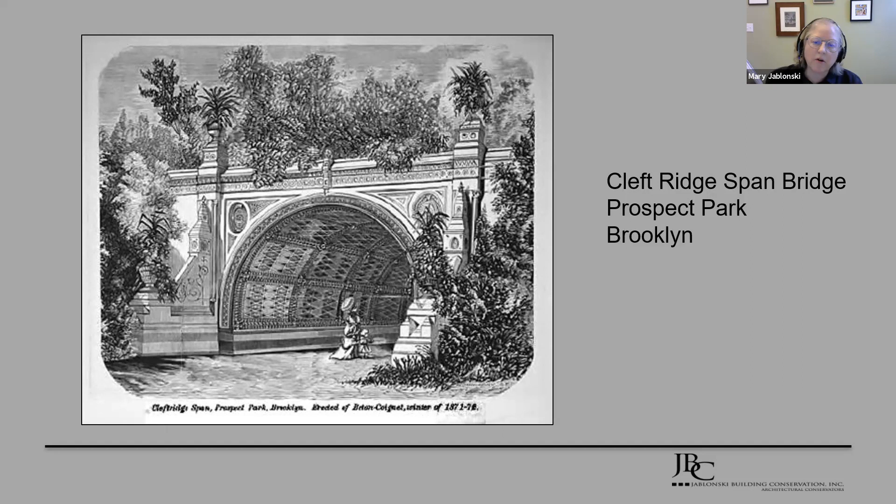And of course, the principal advantage was they could easily produce a lot of the decorative elements quite quickly. And it was much faster and less expensive than carving these units. And here again is a relatively recent picture of this bridge. And you notice that it seems to be in quite decent condition.

Now, as Brooklyn was developing industrially, the Gowanus area became central to the development of Brooklyn. In the 1840s, the Gowanus Creek was a tidal estuary flowing into the Gowanus Bay in New York Harbor. The construction of the canal began in 1849 and was accomplished by deepening and widening the Gowanus Creek and putting in bulkheads along the waterfront. The canal was fully built out by 1869.

It became the center of the industrial growth in Brooklyn, and by 1880, actually, there were 31 firms operating in different industries, such as lumber, coal, hay, grain, and of course, building materials. A decade later, these industries expanded to also include utilities such as gas and electric. But the industrial development also spurred residential housing surrounding the canal basin for canal workers. And the Coignet Building Company became part of this growth.

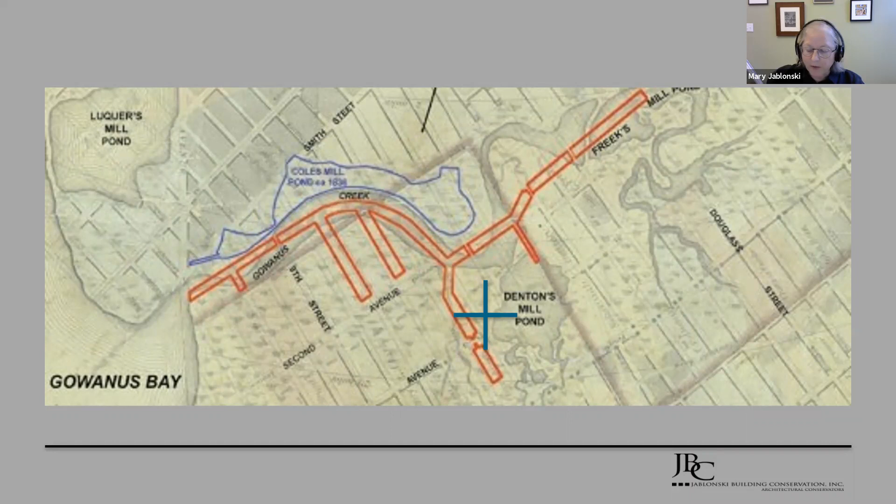As its materials became more popular, there was a need to expand their factory beyond the Carroll Gardens site. They decided to move to the new Gowanus Canal, to the large manufacturing space on 3rd Avenue. It would allow them to easily bring their cast stone into the heart of developing Brooklyn.

As the new factory went up in Gowanus in 1872, the company changed its name actually to the New York and Long Island Stone Company. By this time, it was reputed to be able to manufacture the fronts of 10 houses a day, in addition to all the other decorative elements they made. And their stock list included columns, blocks, keystones, window tracery, and of course, urns.

In addition to their factory, they required a building for offices and showroom. Built in approximately 1872, although the date might be 1874, this building was reputedly designed by William Field and Sons, and the building became part of the 5-acre factory complex that ran along the Gowanus Canal.

Of course, the company constructed their offices with the Béton Coignet cast stone. After all, it was serving as a model of the work that could be done by the company. Customers could see the possibilities of this cast stone actually used. The blocks that made up this building were tinted and treated to resemble stone. Now they could resemble either the grayish-white granite, brownstone, but here they actually used it as looking like limestone.

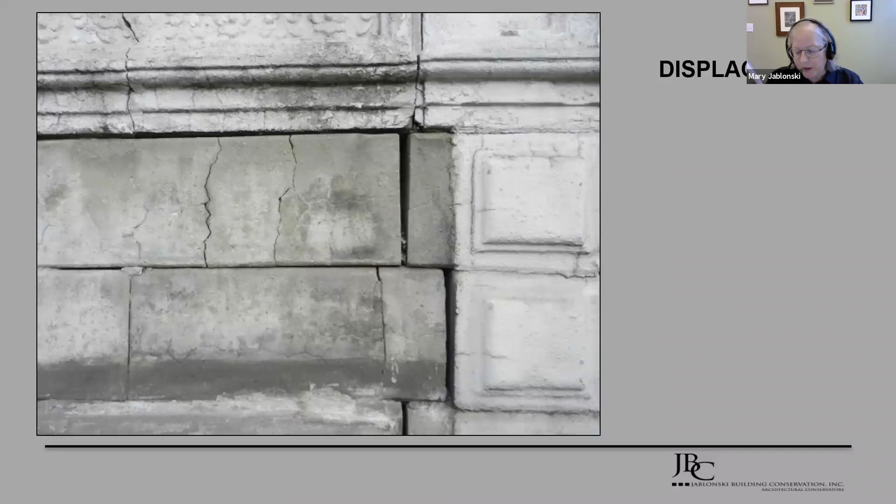Our conditions assessment started as demolition was going on around us. The displacement of some of these extremely large cast stone units, and hopefully you can see here some of these units are really quite displaced, was very disconcerting. The blocks were large and there was nowhere to run if anything went wrong. The realization of the amount of work required was a bit overwhelming, as this displacement was fairly typical for conditions on the building.

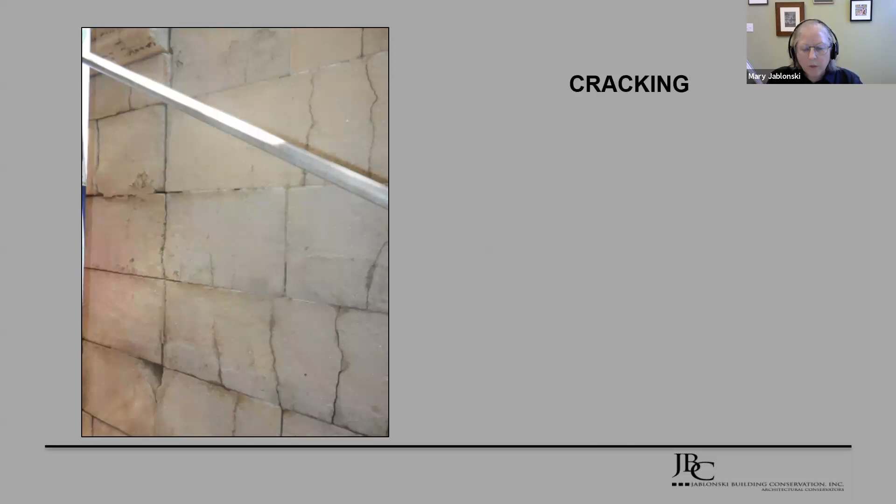It was soon apparent that the cast stone was a veneer, but we didn't know how it was attached to the backup wall. And the demolition occurring at the top of the building as we were surveying didn't add to our comfort. We found a few masonry anchors, but most of them were rusted or in poor condition. We found significant cracks, including hairline cracks everywhere. There was a lot of weathering due to wind, rain, snow, pollution, acid rain, and even salt water. Don't forget, New York City's not far from the ocean.

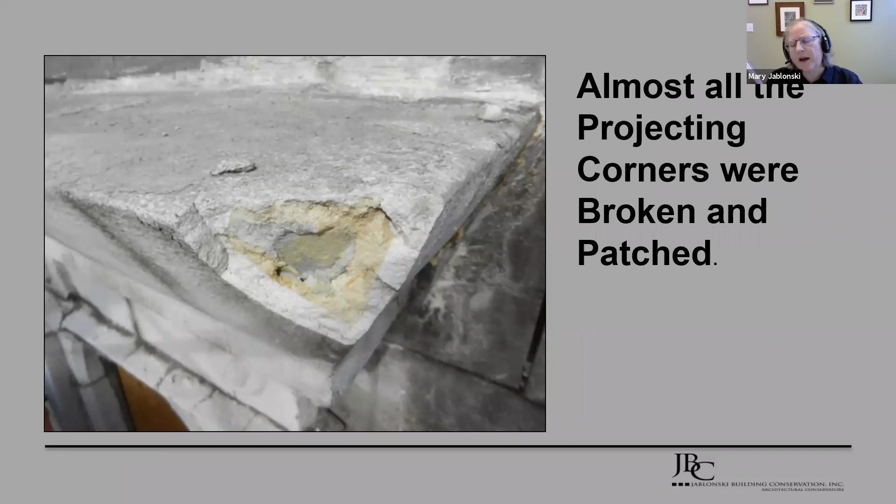There was erosion of cement paste, exposure of aggregate particles, and a loss of crisp edges. There was still brick face on two facades. You can see some of it from the older one. And actually there was this interesting phenomenon that we also found here, and that was almost all the projecting, in fact, all the projecting corners were broken or patched. And possibly this was because they were exposed on four sides, but it appears to have actually been a weakness in the casting of these units.

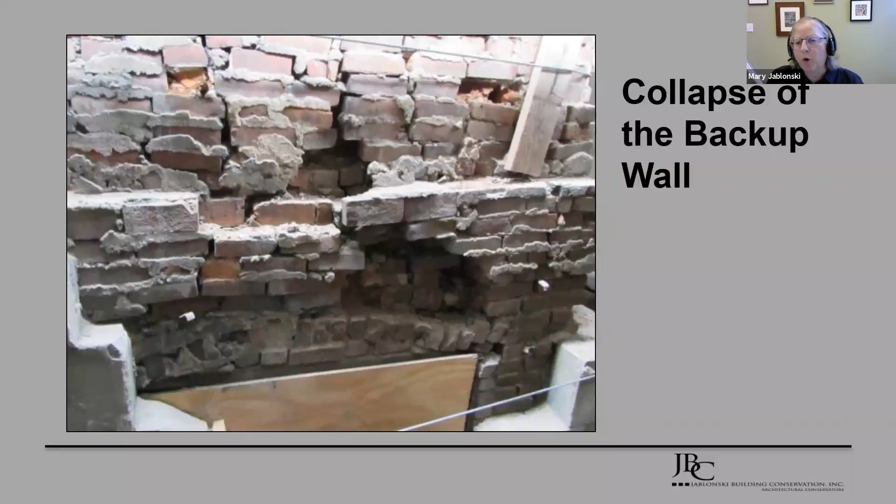There was also a lot of cementitious white paint on any of the cast stone units that had been left exposed. And just to top it off, there was bituminous coating on the back of the building. Most of the window openings were collapsing. The keystone had actually fallen out of one of the openings, which was being shored up. Just to make it even more exciting, the backup wall was collapsing in two locations.

Another important piece of information that we needed for this project was what was the Coignet beton made from? Several people had informed the Landmarks Preservation Commission that the cast stone was natural cement. And that was a reasonable assumption. David Saylor, who was the first to make Portland cement in this country, or at least make a usable one, started fabricating his Portland cement in 1875. And the Coignet Building is 1874.

And in the US, the first large scale cement was Rosendale cement, a natural cement, which was discovered in the 19th century near Rosendale, New York. Now, Rosendale was extremely popular at this period. It was used in the Statue of Liberty, the Capitol building, the Brooklyn Bridge, the Erie Canal, and also lined a lot of water pipes. But while the United States was not producing Portland cement until 1875, it was importing it. The first recorded shipment of Portland cement in the United States was in 1868.

And now, there was a bit of research that John Walsh from Highbridge Materials Consulting turned up on Gillmore's writing on the topic. In 1871, Gillmore had published a practical treatise on Coignet beton and other artificial stones. And a couple of his comments are quite interesting. For beton agglomeré, he says, this name is given to a beton of very superior quality, or more properly speaking, an artificial stone of great strength and hardness, which has resulted from the experiments and researches extending through many years of Monsieur François Coignet of Paris.

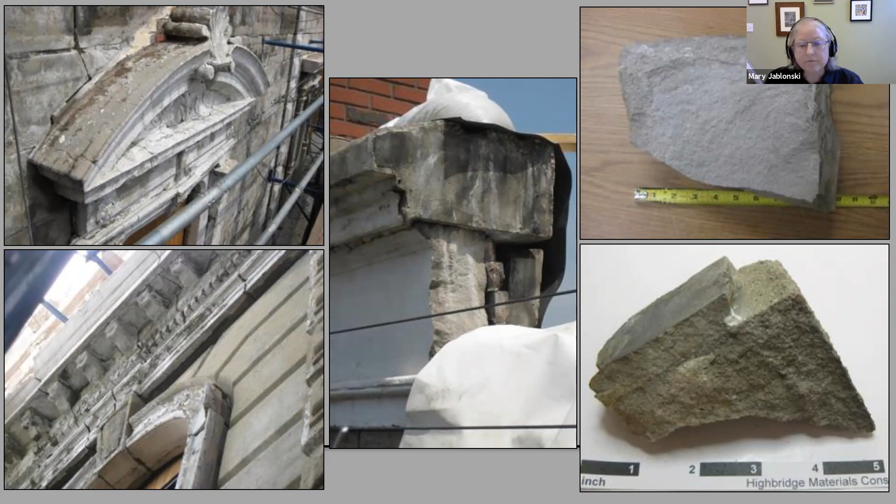So we needed to take samples that we could analyze, and we were told that we were to take an absolute minimal amount of samples that we had to. So we were limited. We selected locations. We took samples, as you can see on the right. The petrographic and chemical analysis of the cast stone was performed by Highbridge Materials Consulting. John Walsh was ecstatic to be actually looking at this stone.

And I can't emphasize enough the importance of using petrographic analysis as part of any thorough investigation to an on-site condition survey of deteriorated concrete structures. Too often, conclusions concerning the nature or cause of deteriorated concrete, as well as the repair of the same, are based on visual observations only.

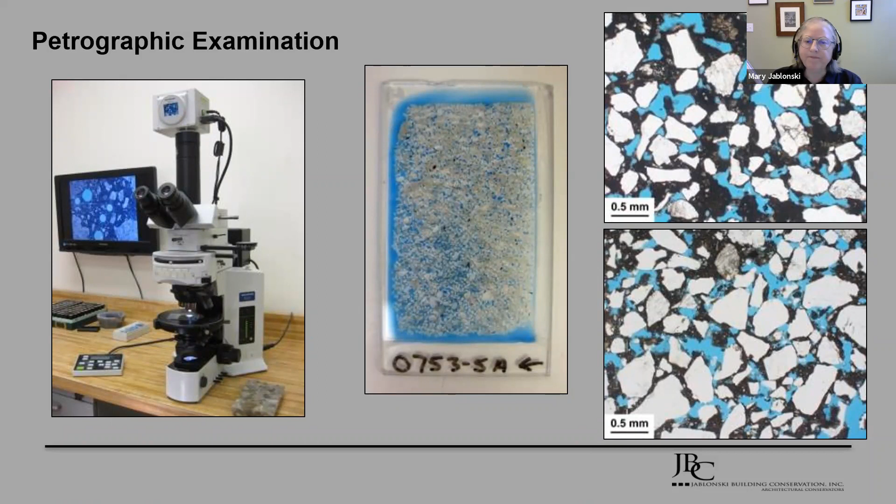But petrographic analysis can be used to identify chemical and physical elements of the concrete, including the nature of deterioration, the identification of aggregate strength, mixture proportion estimates such as water and cement ratio, aggregate size and distribution. And we actually found some really fascinating findings from this.

This was the aggregate. Now, a number of you probably are quite conversant with aggregate in Portland cement or in cast stone. This is extremely fine aggregate, not what you would ever think would be found with concrete. Another incredible finding was that this was pre-rotary kiln Portland cement. It was European, probably French or German, not natural cement.

And in the early days of Portland cement production, kilns were vertical and stationary, as you can see on the left. It was only in 1885 that an English engineer developed a more efficient kiln that was horizontal, slightly tilted, and could rotate, which you see on the right. The rotary kiln provided better temperature control and did a better job at mixing materials. By 1890, rotary kilns dominated the market.

And just as an aside, in 1909, Thomas Edison received a patent for the first long kiln, which he installed at the Edison Portland Cement Works in New Village, New Jersey. And it was 150 feet long, which is about 70 feet longer than any of the other kilns used in the period. But back to my Coignet Beton.

The other findings were that it was dry tamp, or a very dry cement that was rammed. The beton was actually itself in excellent condition. There were no major durability issues. The problems that we had seen with the cracks were consistent basically with structural rather than material issues.

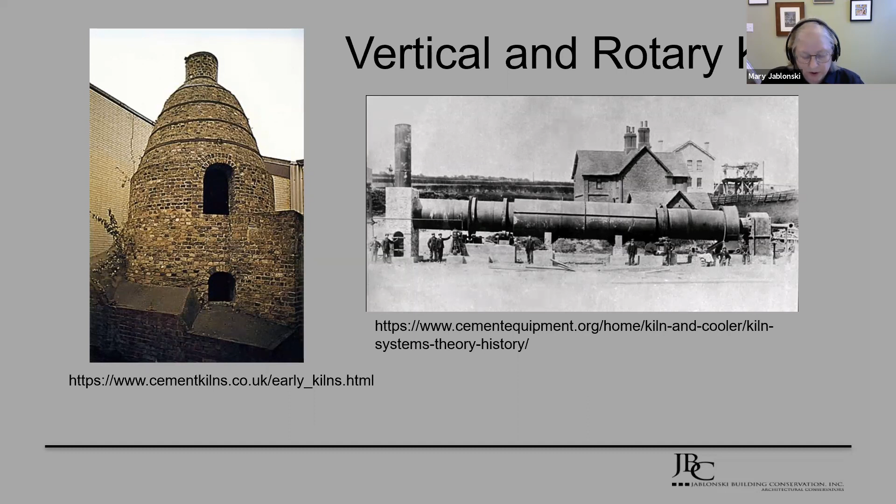So as we were conducting our conditions assessment and Highbridge was undertaking the petrographic analysis, work was continuing on the Coignet Building. It became very clear from our report that the current scope of work for the contractor had to change, and the new scope was really outside their skill set. Luckily, the contractor did not wish to continue with the project. A new contractor had to be found. And Stone and Lime, a Massachusetts firm and a masonry contracting firm, was brought onto the project, and there was very little time to complete it, so a very quick reset had to be done.

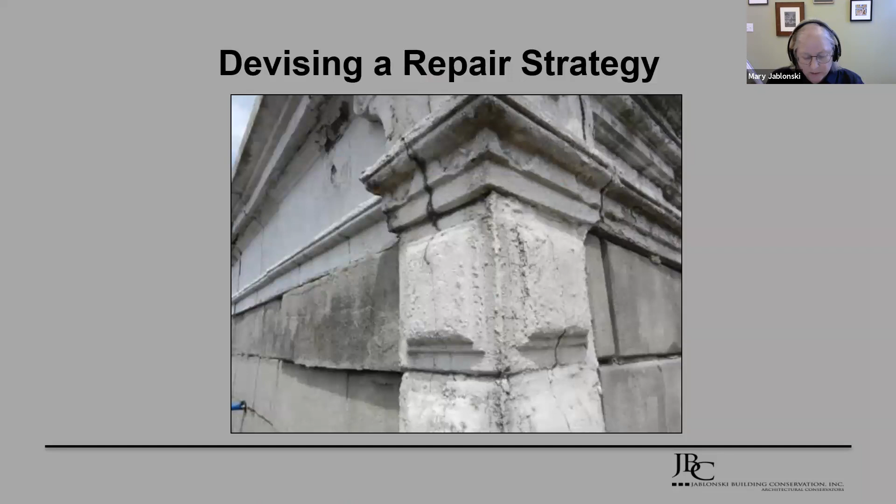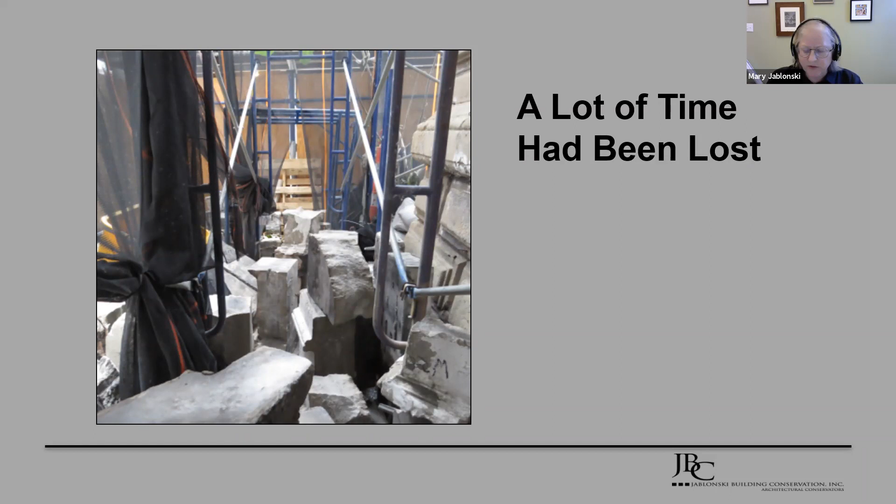A repair strategy had to be designed, and there were some really major constraints. Time was a major one. The previous contractor had cost the client almost a year. Portions of the building were rapidly failing. And the landmarks permit allowed for extensive replacement of the cast stone unit, which had led to a number of units actually being lost. A great deal of the material was missing from the top of the building.

So the most important decision was how much of the cast stone were we willing to replace? Replacement of original materials should be the last resort. But who defines last resort? What defines a piece of cast stone as beyond repair?

Traditionally, many of us have replaced concrete and cast stone wherever it's deteriorated. This building, with its very early cast stone and a technology long lost, made me seriously think about what this means for authenticity and even losing the historic record.

One of the most significant historic and technical aspects of this building is that it was built to showcase a specific material, Coignet Beton. The entire building was covered in it. There were flat pieces and ornamental pieces and large pieces and small pieces.

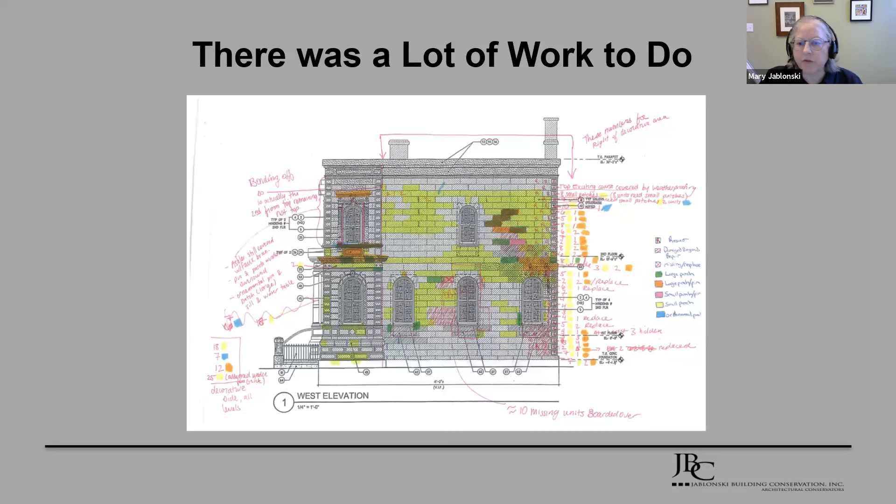So there were some easy decisions to make about this. One, the brick face had to go. It was taken off and the facades had to be resurveyed. There was a lot of work to do, as you can sort of see here from this drawing. The paint and cementitious surface repairs all had to be taken off, and it was very labor intensive.

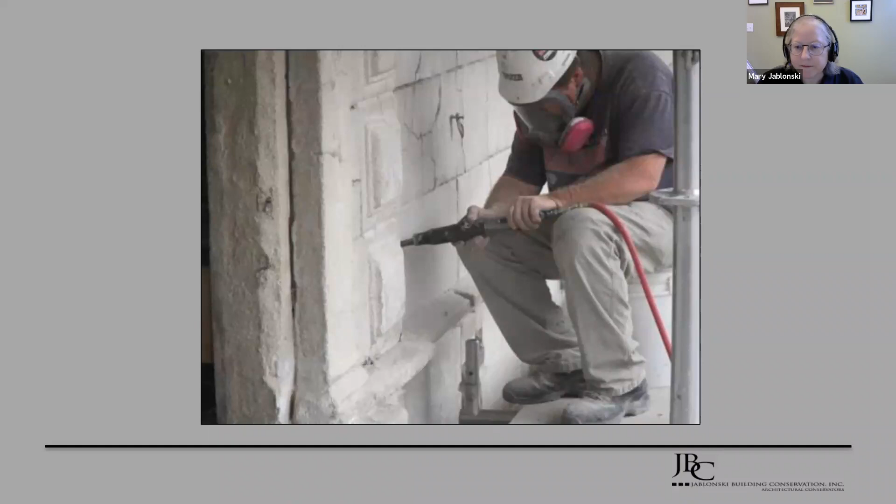Removing the brick face was extremely difficult, to put it kindly. And it was the difficulty that the previous contractor had trying to remove it that was the initial reason we got called in the first place. And this was sort of what happened, and we had to even out the surface on this.

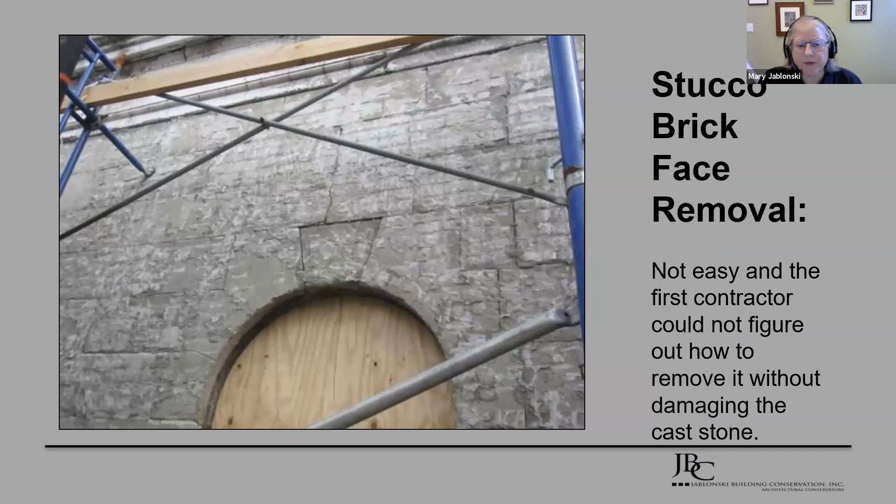Now, the vast majority of concrete preservation projects are triggered by visible damage, and therefore patch repair of concrete is really an integral part of any repair. Despite this being a common repair, there is a lot of widespread disagreement over the techniques, what should be done and what the parameters are.

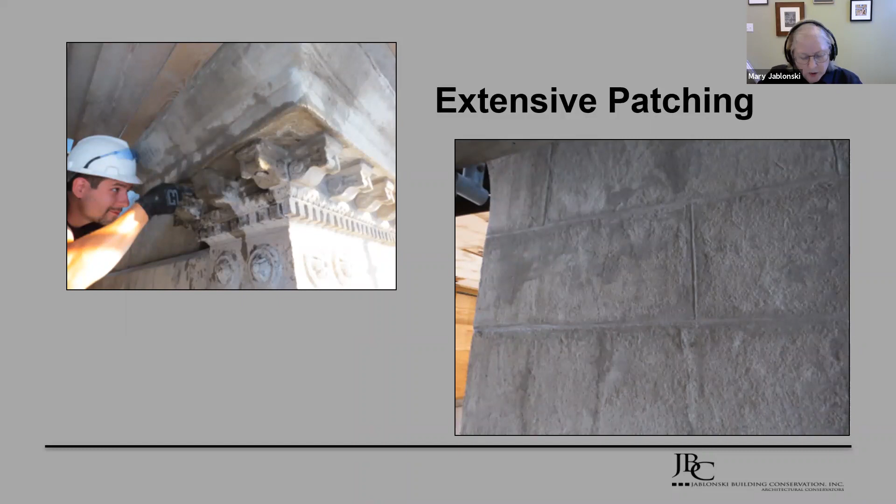And with this level of disagreement and a lack of knowledge about durability of types of repairs, it really makes for a difficult conversation. And there's various materials you can use. We decided, because this was a Portland cement, that we were actually going to make repairs with Portland cement, which is what we did.

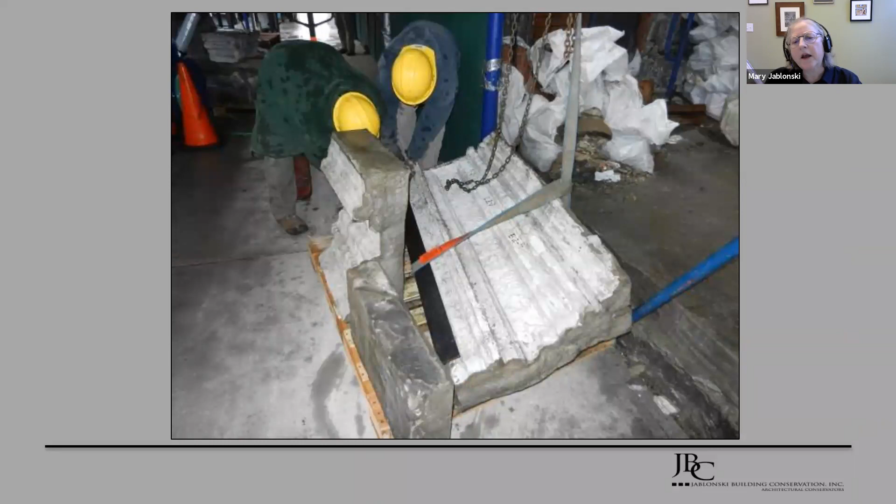We also had this incredible problem of the size of the units. These units were huge and weighed a lot. You can see the size of these units next to these two workers. And again, here you can see the guy palletizing and just how big these units were. There was no place to work on these units at the site. They all had to be trucked off the site to be worked on in a factory shop.

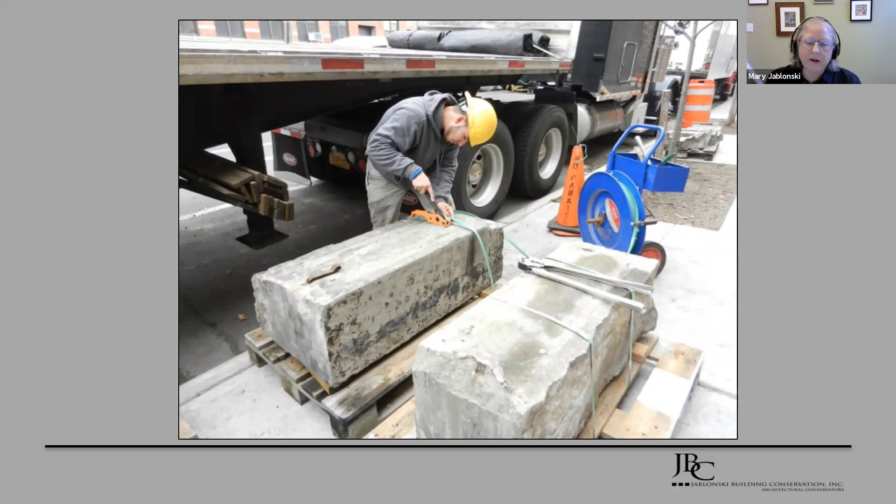Now, the first contractor had thought they were going to remove the displaced units at the top of the building, fix the brick backup wall, and then install new cast stone units. These incredibly large units were difficult to remove, particularly as most of the building was boxed in by Whole Foods by the time anybody started doing the restoration work. There was really little room to maneuver the blocks down from the building.

It also appears the first contractor had no idea of the weight of the units. The scaffold was not really strong enough for the job. In fact, I was on the scaffold with the second contractor looking at the building when the scaffold was hit by a truck. It luckily didn't collapse, but it got replaced very shortly with a much more robust one that could allow for the weight of the Coignet Building units.

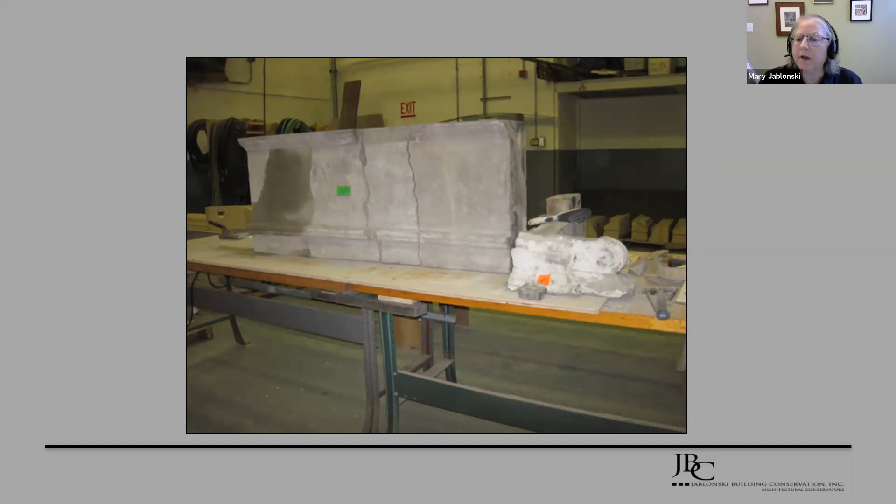Now, another unfortunate occurrence with the first contractor was that in order to get the units down, the workers jackhammered the large units into smaller pieces. So our job was then to try to piece together as many of these pieces as we possibly could. Here you can see one of the pieces being put back together and being patched. And tension rods were sometimes used to get these pieces to hold together.

Working on the surface repairs was very labor intensive, and the patches not only had to match color, but they had to match the weathered surface.

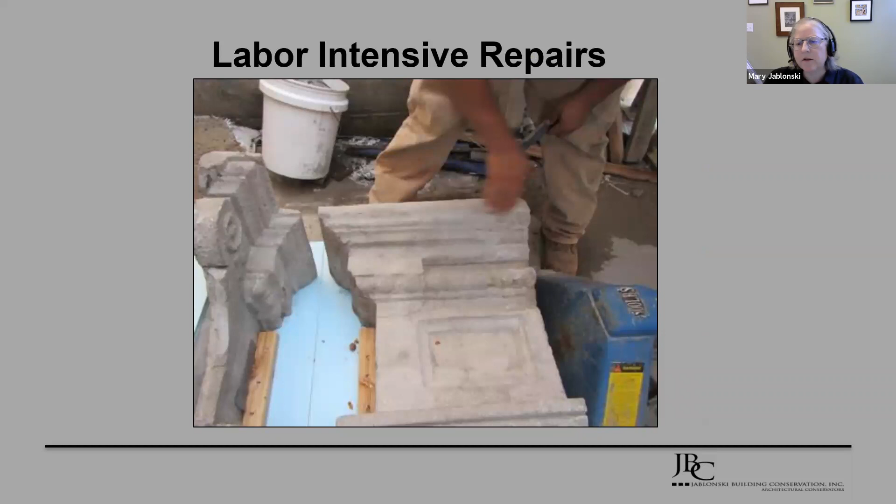We actually made the decision to lime wash the building, and it wasn't made lightly. There were three issues. One, the cracks on the building could be bridged with a lime wash, but it would also offer a lot of protection to the cast stone units. It wasn't a permanent coating, but it would increase the lifespan of the building and serve as a protective coating. And we felt this was particularly true for a lot of the very weathered decorative elements.

The third reason, actually, we decided to go with a lime wash was to provide a more uniform surface appearance, which was the intention of the original design. We had no time to age our patching and the mix used to create new units. We expected the repairs that we did would not always match the color of the original units.

Now, concrete patches can be made that match the original material for a short period of time. However, as the concrete cures and ages, the colors of the repair mixes start to diverge from the original color. And this is often apparent 6 months to a year later. This is why it's necessary to have time to design repairs in concrete mixes when restoring concrete buildings.

Ideally, patching mixes and any mixes for new concrete material would require a year or two to get right. For a building of this importance, it really needed to have been done long before. Unfortunately, there is little written literature with this recommendation. The International Masonry Institute and Amy Lamb Woods certainly have been working to rectify this. And there are some other publications that are useful resources that have come out. One of the most recent ones actually is this Getty publication on concrete case studies, which I highly recommend for anyone interested.